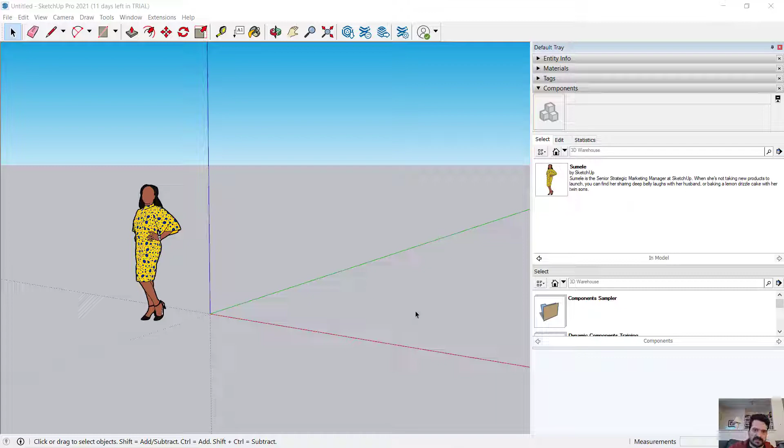First, I'm going to make a new file from the template architectural inches. I'm going to select this component and delete it.

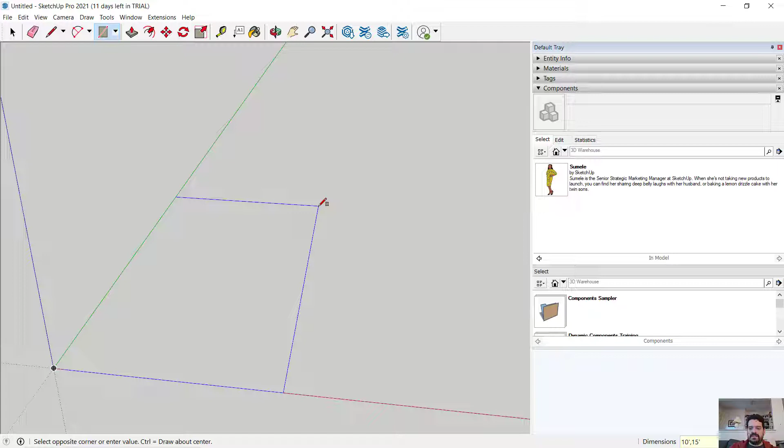I'm going to draw using a rectangle tool, so Shapes, Rectangle. I'm going to click at the origin, and now I'm going to type in two numbers: 10 feet, comma, 15 feet, enter. That is going to define the second point, so it went 10 feet, 15 feet. I now have a rectangle defined.

I'm going to click in the shaded area and drag it up, then type in 3 feet, enter. What I've made now is a 10 by 15 by 3 foot volume. We'll call this our slab.

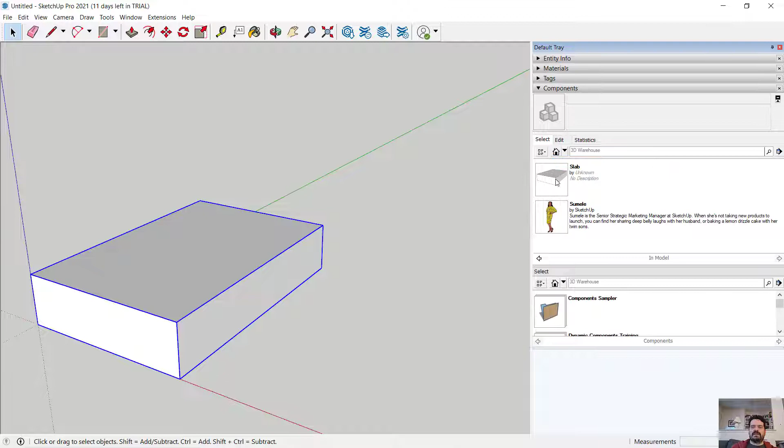I'm going to define this as a component so that any other modeling I do does not automatically adjoin, abut and join this object. So I'll triple click to select the entire object, right click, make component. I'll call this slab. In my default tray, if I look in Components and then Model, I will now see slab as a component, meaning I could add, move, and duplicate and have several of these slabs.

I'm going to delete those because I only want one. The reason I made it a component was that anything else I model will not automatically become part of this slab once it's a component in the scene.

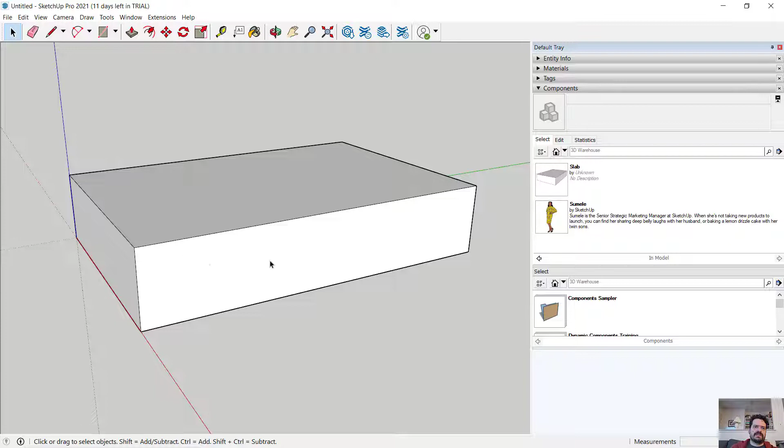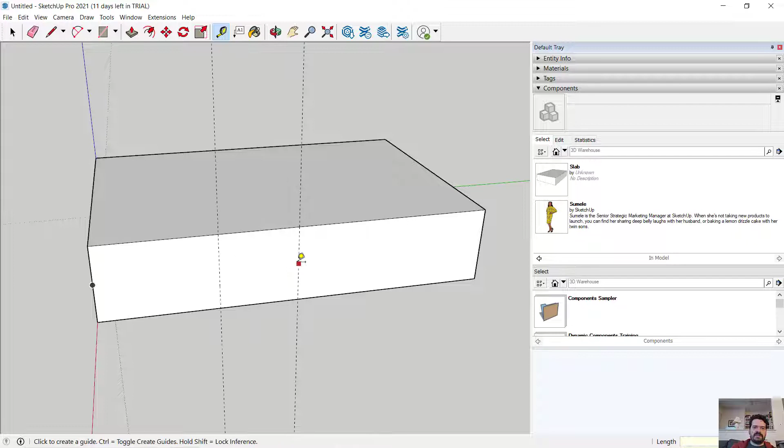I'm going to use my measuring tape to measure out where I want to abut a staircase. The measuring tape tool works by clicking and offsetting. Let's do that, that's the center point. This creates lines that are not the same as geometry lines, they're guidelines. I'm going to type in 3 feet this way, click and drag 3 feet this way.

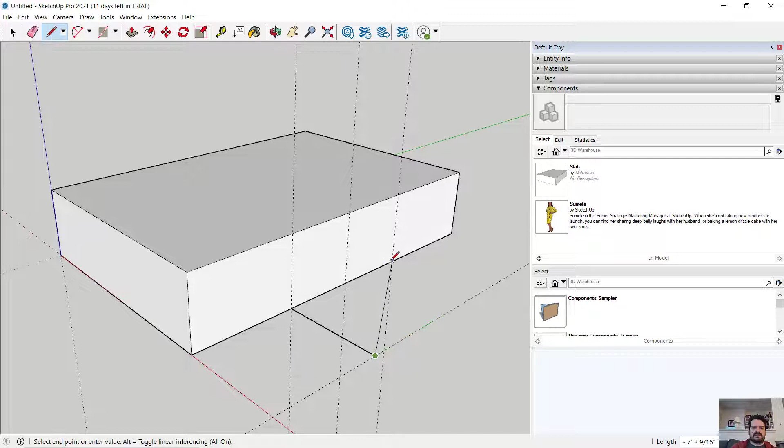And now I have a guideline for what I want to make. I'm also going to take this line and go, say, 4 feet in this direction. I'm going to use some snaps to draw from intersections to each of these lines. So that is the footprint of my staircase.

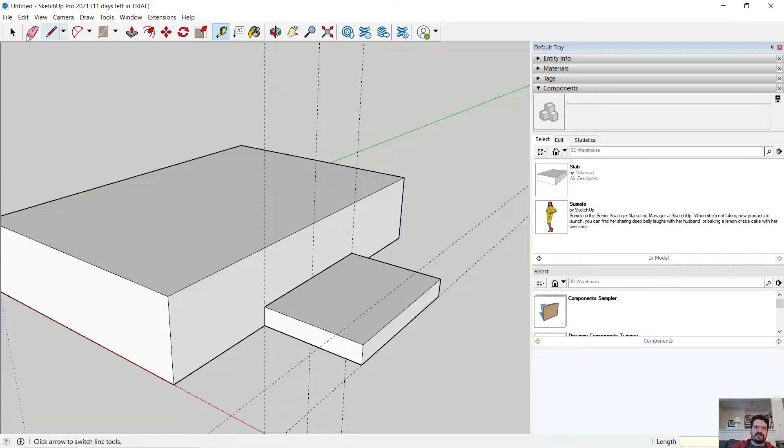I'm going to extrude that up 9 inches, so click and drag and then type in 9 inches. I'm going to make a guideline from here and go in 12 inches, and draw by snapping to that guideline, then extrude up another 9 inches.

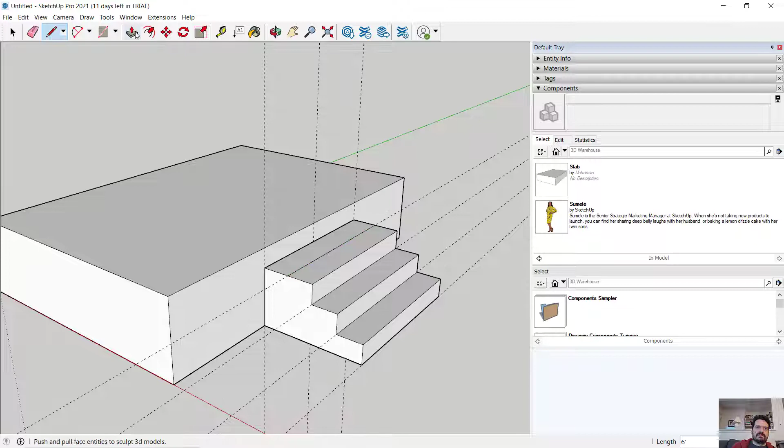I'm going to keep repeating this: 12 inches, 9 inches. There we go. Now, while this looks continuous with that slab, it is its own entity.

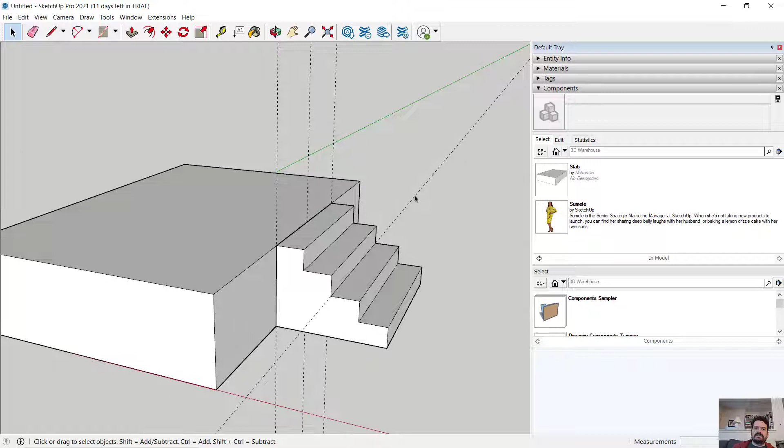Because of the component nature of the slab, this model is not connecting to that slab. I'm going to select and delete my guidelines, I don't think I need these anymore in my scene.

Let me make a new component out of this staircase. I'm going to triple click, right click, make component, let's call it stair. And now I can move this stair component. I could, let's say, add another stair component.

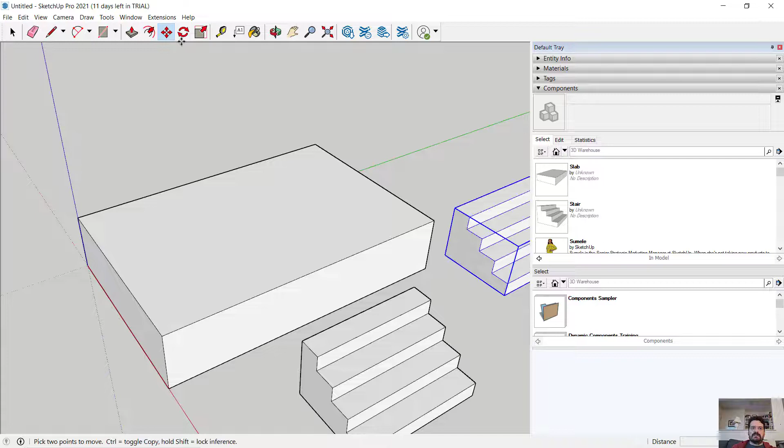I could rotate that second stair component 90 degrees, snap it from midpoint to midpoint, move this stair back from midpoint to midpoint. I could add yet one more stair.

What's important to realize is because these are 3 instances of the same component, stair, stair, and stair, and none of them have been exploded, they're still active components, any change I make to one of these will update for all of them. That's very powerful if I want to make objects that repeat through a model.

In order to edit this component, I'm going to right-click, edit component, and I think I'm going to add a little bit of a nose to these stair treads.

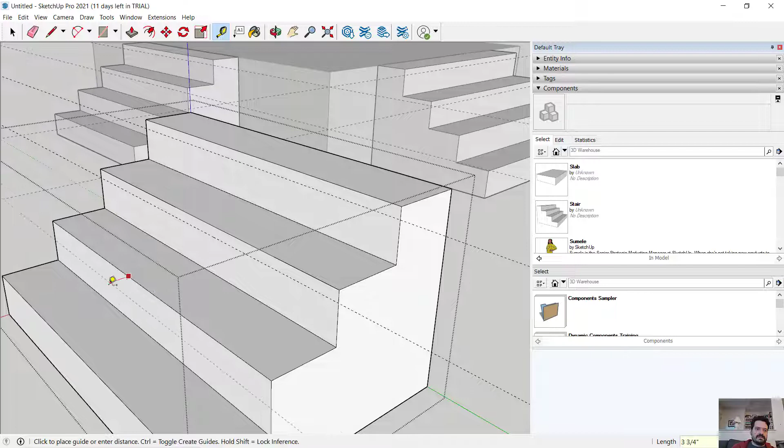So I'm going to click and make some guidelines that come down 2 inches in this direction, using that same guide tool. I'm going to draw lines to give me something new, a new face, a new subdivision face to extrude.

And I'll use push-pull to come out 1 inch, 1 inch. In the background, you may be able to see my other components are now updating, because these are shared components, they're updating.

If I simply click outside of this component that I'm editing, notice it was drawn with a bounding box of sorts, this kind of dashed line. If I click out, I remove that feature, and I'm no longer editing this component.

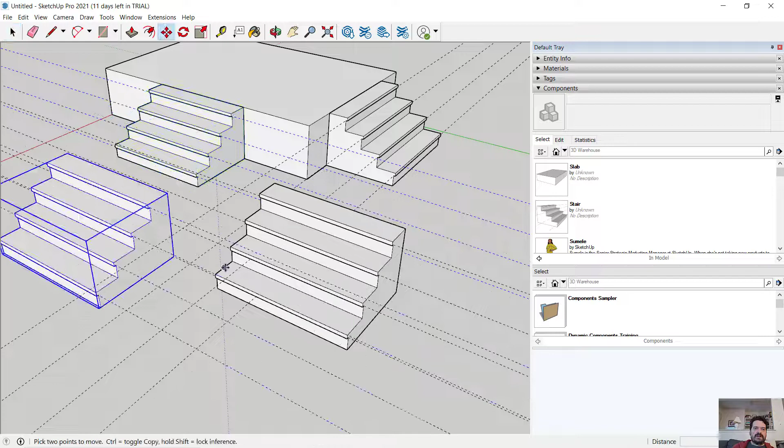These two components have updated, any new versions of the stair that I pull out are going to be updated. If I wanted to edit this further, I could double click and I return into an edit component state or mode where I have this bounding box line. If I click off, I get rid of that.

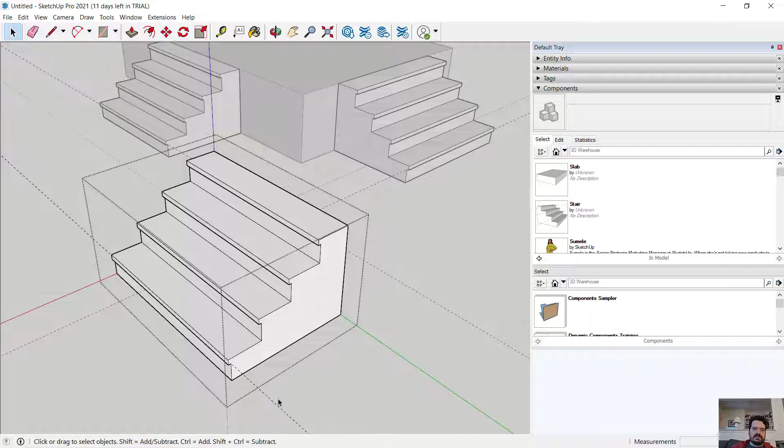I think what I want to do, let me go in and select, I want to get rid of these guidelines because they served their purpose, I don't need them to clutter my scene anymore. And in fact, I can select and delete the staircase.

What I have now is a stair component that I could place anywhere I wanted in any number in my scene, and if one updates, they will all update together. So that's a little hint at how components are powerful for any object that I want to have multiples of, or any object that I want to be able to change instances of in the future downstream in my modeling process.